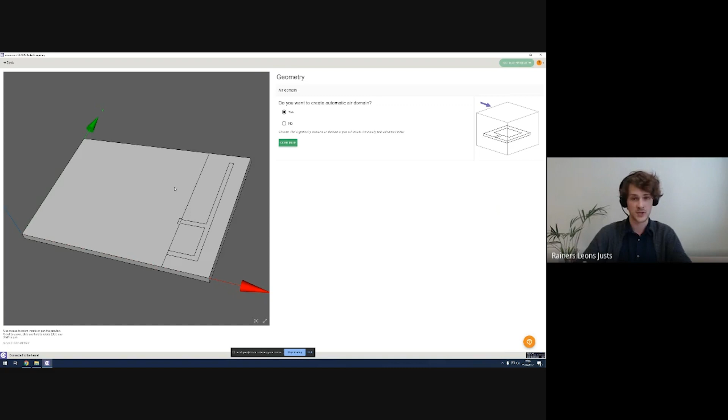So next up, we're greeted by the geometry application type screen. As you can see, CENOS now has more predefined application types, but these are not the limit of RF 2.0 - you're able to simulate anything you want with custom.

Primarily we have defined 5 predefined application types. The first one being microstrip/PCB. The second one is wire antennas. The third one are reflector and dish antennas. The next one is multi-port networks. And last but not least, waveguides.

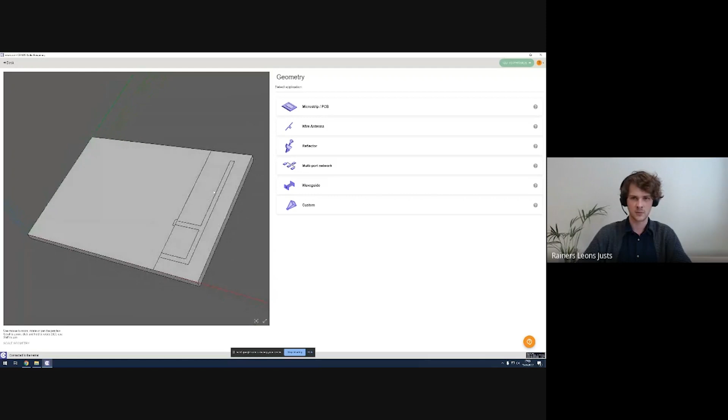So the model that I've chosen is an IFA antenna, which falls into the microstrip/PCB category. Let me just click that, and now we're greeted by the role assignment stage.

The first thing that CENOS asks us to assign is the substrate. Let me click on that role, and now it's going to ask me to assign a volume for the substrate. In this model, we only have the one volume, which is the basic PCB. To assign it, we just have to click in the preview. It gets clicked on the volumes tab on the right side as well, and then just click assign substrate. It's really that easy. Next up is the patch.

In this model, we defined the patch to be a 2D face on the substrate. To select that face, we have to head into the Faces tab and select the patch. Select that in the preview, it turns blue, then press Assign Patch.

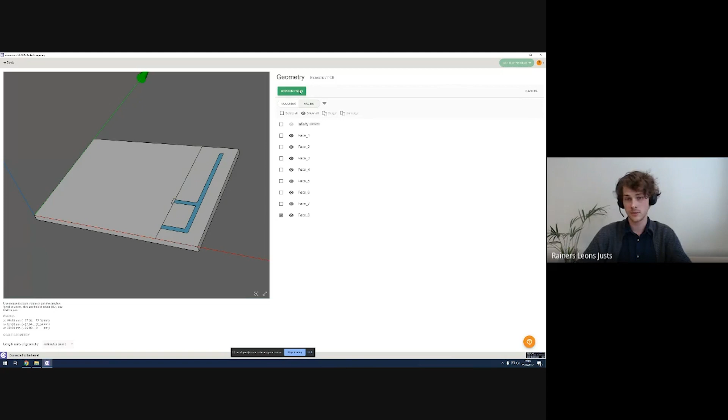Same goes for the ground. We click on ground, assign the 2D face that I've defined previously as the ground, click, and assign ground. It's really that simple. Next up is the port definition.

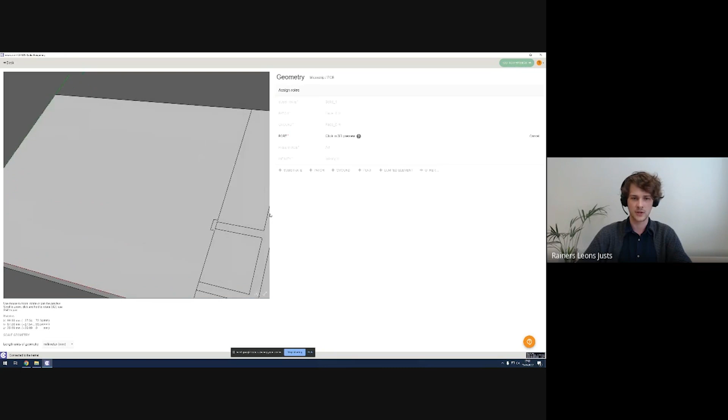So we've introduced the point-based port definitions, which make the port definitions infinitely easy. All we have to do is select the role. It asks us to click in the preview to select 2 points. Let me pan over to the place I want to select the ports, and then I just assign point 1 and point 2. So I selected the 2 points between which the voltage will be applied.

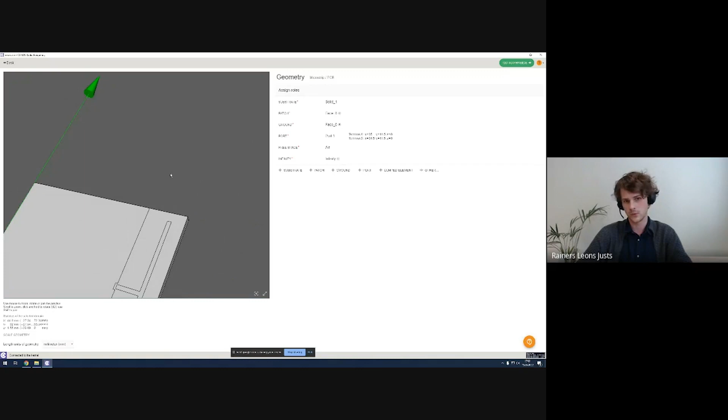And now basically the model is ready. But if I did have a much more complex model, such as I'd have another substrate with its own patch and ground here as well, I could just add additional roles with the add substrate, add patch, and so on. If I had a multi-port network, I could just add a second port as well and define it like such.

We also introduced lumped elements. Basically the same way that we defined the port, we could just select two different points on the model and assign resistance, inductance, or capacitance to those 2 points, just by clicking Add Lumped Element.

And so, since this model is quite basic, I've already defined everything, and now we can just head on over to the physical settings stage. To do so, we just click Go to Physics.

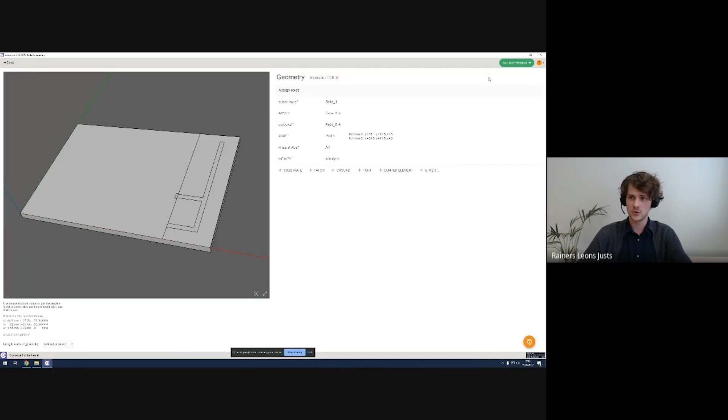And now, in the physical settings, the first thing we are greeted by is the Simulation Control tab. Here, we select the frequency in which we want to simulate. So we are able to simulate in a single frequency, or we can define a frequency sweep as well. In this case, I'm going to select 2100 megahertz as the starting frequency and 2400 megahertz as the end frequency, and for the frequency step, I'm going to select 100 megahertz.

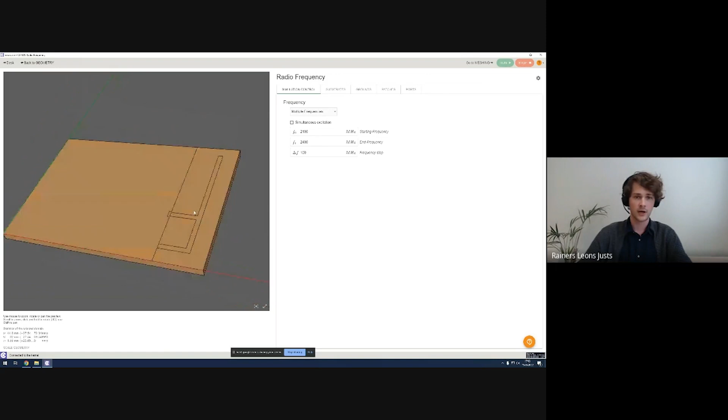Here you can also see a switch that says Simultaneous Excitation. So if I had created a model that included more than one port, I could decide to enable simultaneous or sequential excitation of the ports. But in this case, I only have the one, so I'll leave that as is.

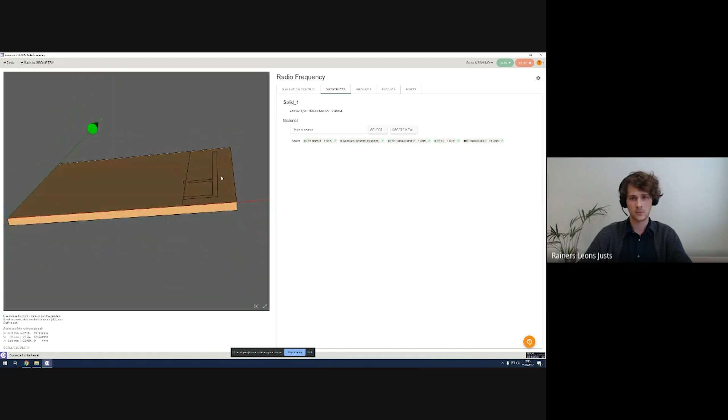Over on the next tab, we see the substrate, and we have to assign the material for that volume. CENOS already has quite a few materials defined from which you can choose. You can also create new materials by clicking New, creating a name for it, and assigning parameters such as the dielectric constant and the dielectric loss tangent. In this case, I'm going to select the predefined FR4 as it suits my needs just fine - I select the FR4 and then press Apply.

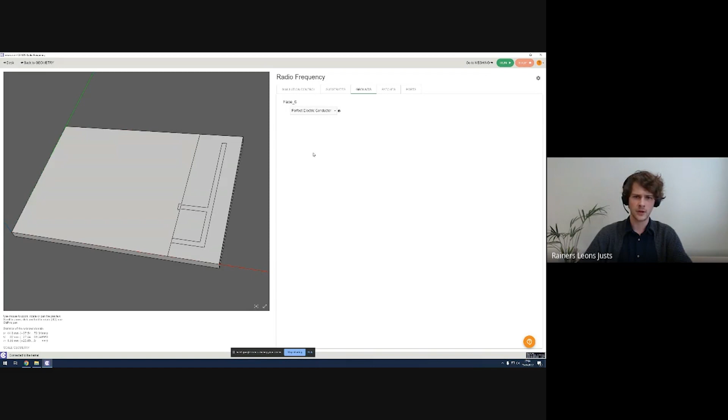So now I have pretty much defined everything in the model. We also see two other tabs here called Ground and Patch. These are already predefined as perfect electric conductor, and we really don't need to do anything here unless we want to simulate using real materials.

To do so, we just open the drop-down tab and select conductor. Here we can also assign the ground to be, let's say, copper, and then we would simulate using real materials. In this case, I'll keep both the ground and the patch as a perfect electric conductor.

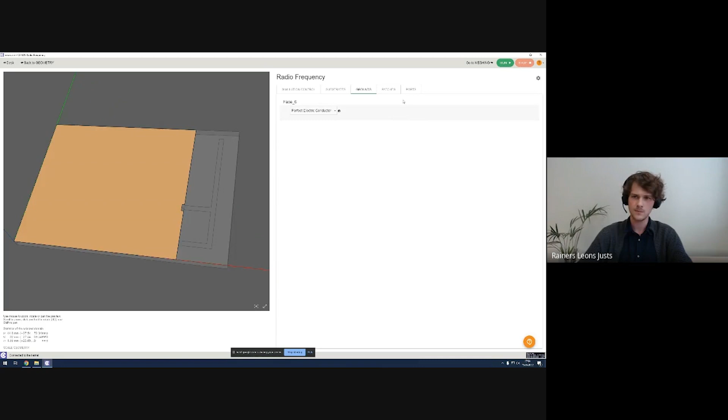In the last tab, we see the port. Here we already have automatically assigned the impedance for the port and the phase shift angle to be 0. But if you want to apply a phase shift, or if you have multiple ports and want to simulate phased arrays, you'll be able to assign a phase shift angle for each port.

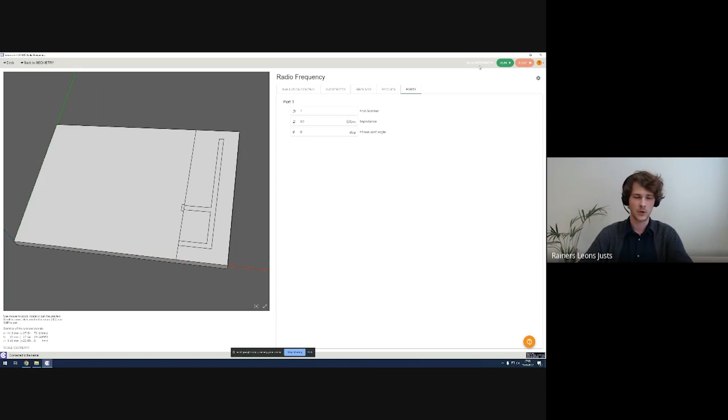And basically, the model is already done. So if I want to simulate right now, I can just click Run and it's going to simulate the case. However, I did mention there is a fourth and optional step, which is meshing. In this step, you're able to manipulate the automatic mesh to your needs, so basically manual meshing. Let me showcase that quickly.

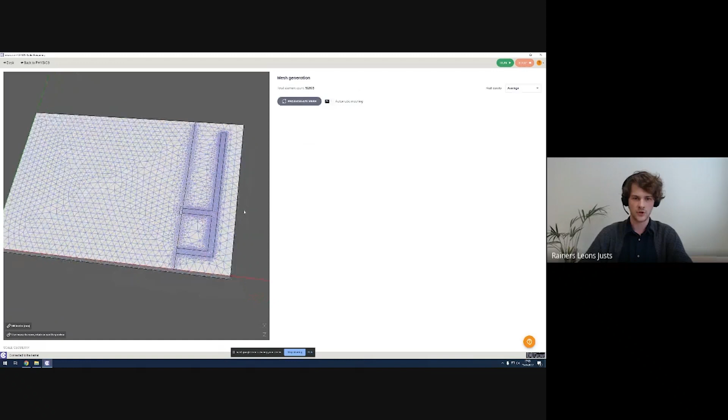So for starters, we're greeted with the bare model. Before we can actually do any manual meshing, all we have to do is just press Calculate Mesh, and it's going to create the automatic mesh for the model itself. As you can see, the mesh already took into account the rules we assigned, so it meshed the patch finer and the edges to the ground as well.

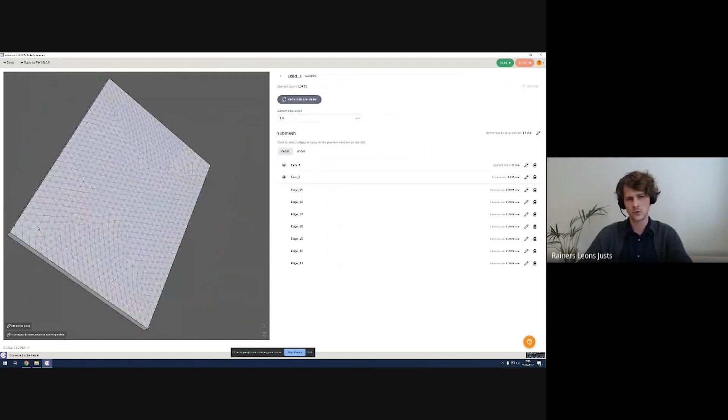But if I want to add another refinement, I can just disable the automatic meshing, and now we can head into the submesh for the substrate. Here we can select whether or not we want to select individual faces to mesh finer, or select another edge selection and assign more edges that I want to refine more finely. We can also already see the characteristics that the automatic mesher has already applied.

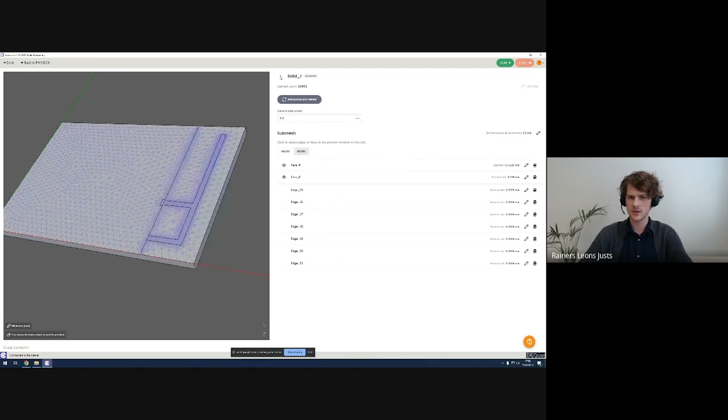So in this case, I think the model looks quite good, so I'm not going to do any manual meshing. Right now, I'm just going to press Run the case.

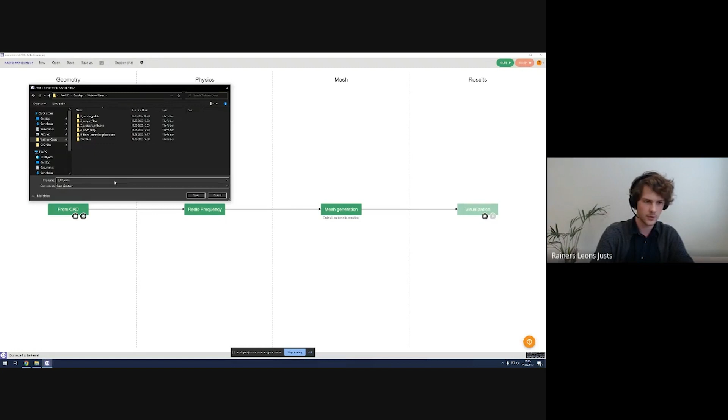Before we can actually run the case, we have to save the case in order to save the results. So let me do so. Let me save this as 0_IFA webinar. Press Enter, and then it's going to run the case.

So now we have about 1 or 2 minutes while the simulation finishes. So let me showcase another important feature of CENOS, which is the live support chat.

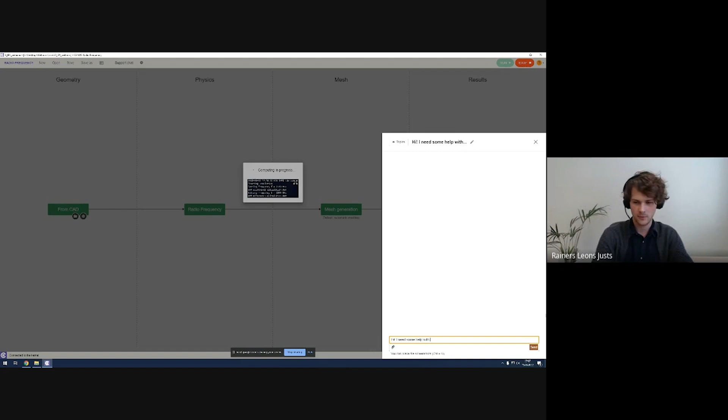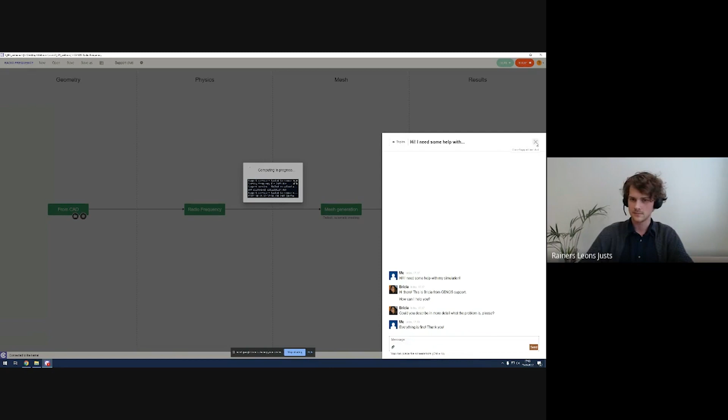So the results are about to be done. Looks like we also see that Bricia has mentioned something else, so everything's fine there. And so we have to wait a few more seconds until the results are prepared.

So now it's starting our visualization tool, which is ParaView. It might take a little bit more time since I'm streaming this. So here we see the results. The initial screen of ParaView shows us the radiation pattern of the antenna and the electric field distribution.

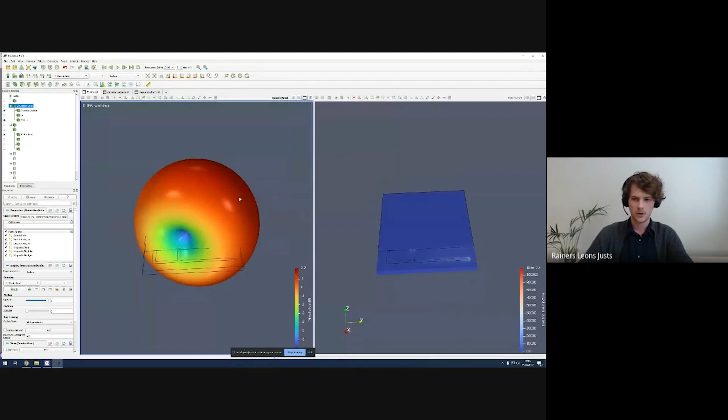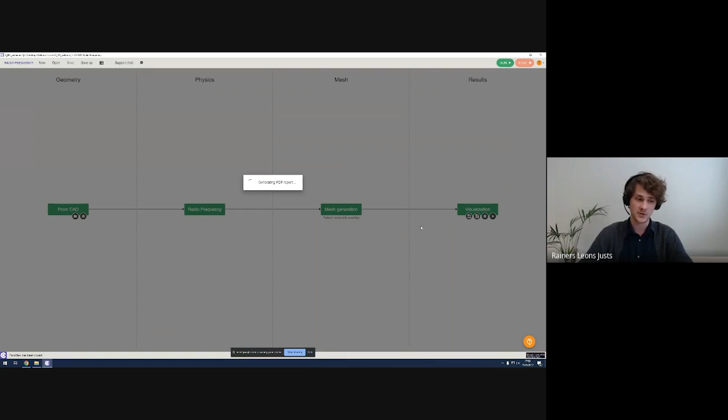So let me showcase another great feature of CENOS. Let me close ParaView here, and let's generate a PDF report. This is a handy feature that you can use to share the results of your simulation with a customer or a colleague, or maybe even a superior. You can probably also store these in your own databases to showcase and keep as results later on.

So this is the antenna we just simulated. It shows all of the results that we saw before in ParaView, and here's the 3D far field as well.

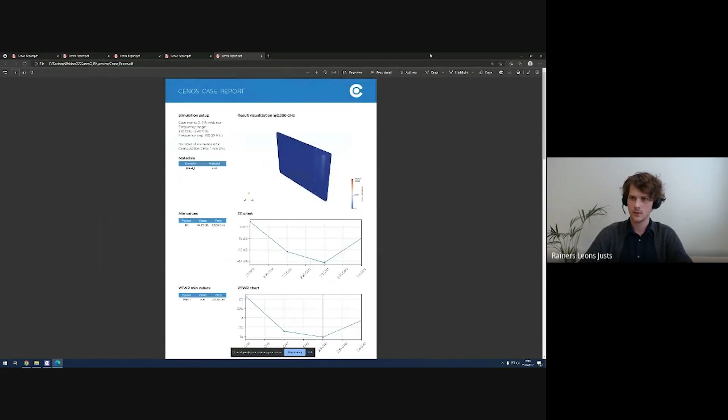So basically this is a quite simple case to simulate. We have also prepared a few other cases that are more complex than this one. Let me open up one now.

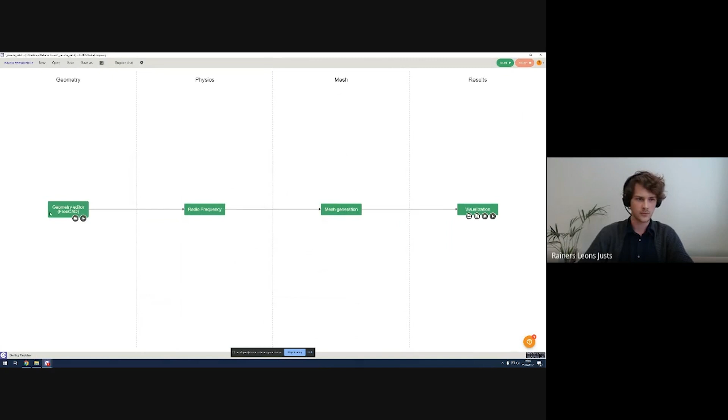First off, we have a circular patch antenna. As you can see, it has an SMA connector at the end as well. Since you already simulated this, I can just open up the results. So the same deal that we saw before: the radiation pattern, the electric field, and the frequency charts.

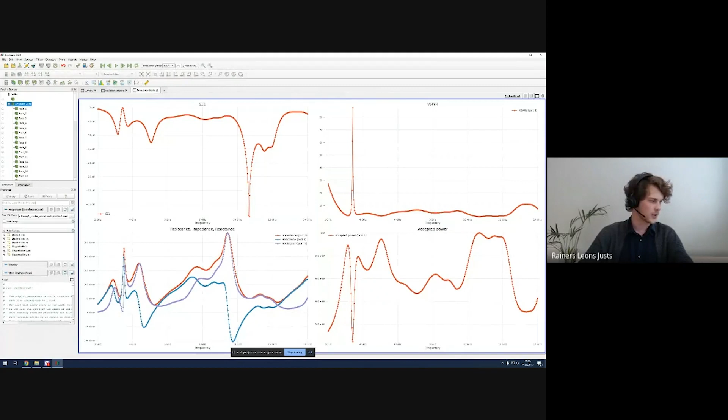Next up, let me close this. We have a hairpin filter, so a multi-port network. We can take a look at them all here. Let me open up the results for it as well.

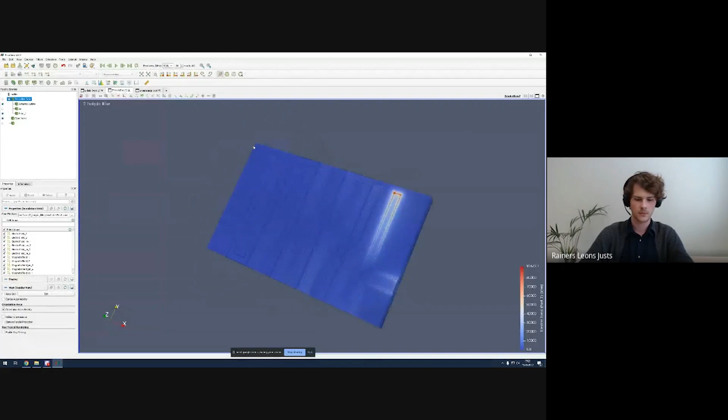In this case, since we used multiple ports, we just see the electric field for each individual port. The first slide is port 1, and the second slide is port 2. Here's the S parameter plot, and let me select the frequency, let's say about 3 gigahertz.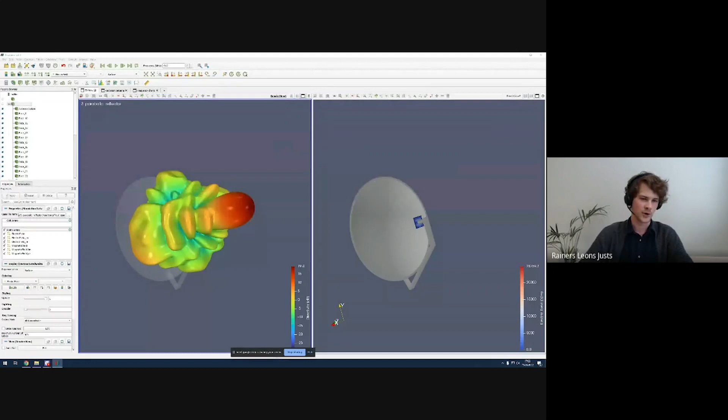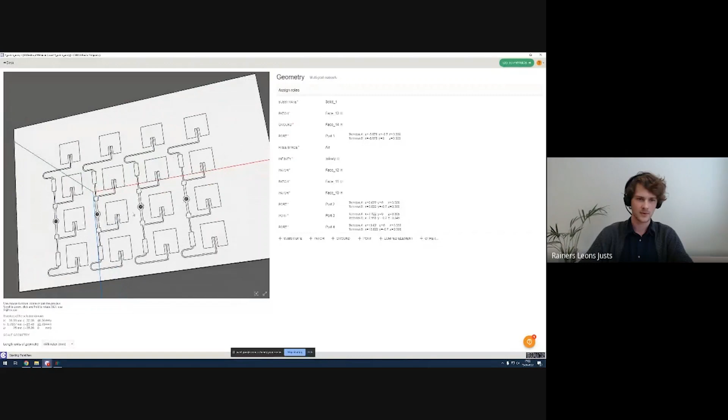Another case we can showcase right now is a lot more complex than anything we've shown before. This is a 4-port phase-shifted patch array. Quite a beautiful design, if I say so myself. Let me open up the results for that as well.

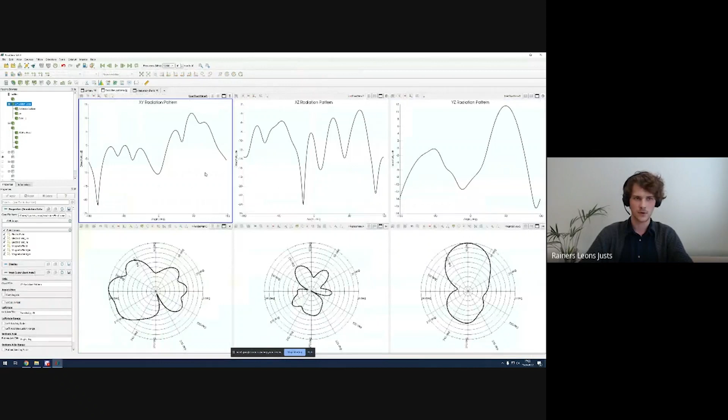Each port has a different phase shift angle applied to it, and that is why we can see some beam steering as well. Here are the polar and the Cartesian slices of the radiation pattern, and here are the frequency charts as well.

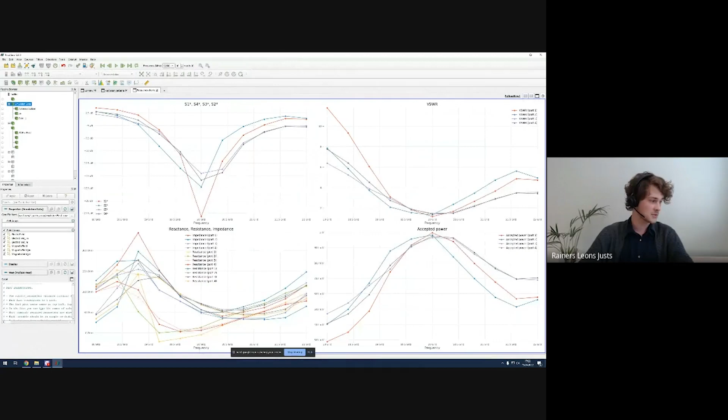And last but not least, a placement study. Here's a drone controller that has a patch antenna placed on top of it. The base of the controller itself has been selected to be aluminum.

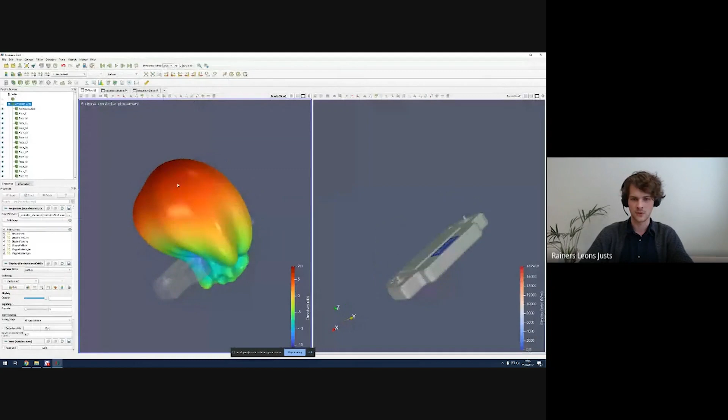And here are the results for the antenna. As you can see, the radiation pattern is really affected by the material of the object that it's placed on. So let's select a different frequency — you can see that the radiation pattern will change in a second.

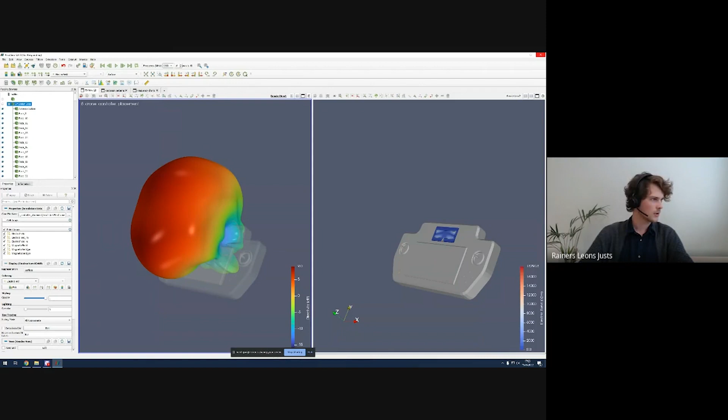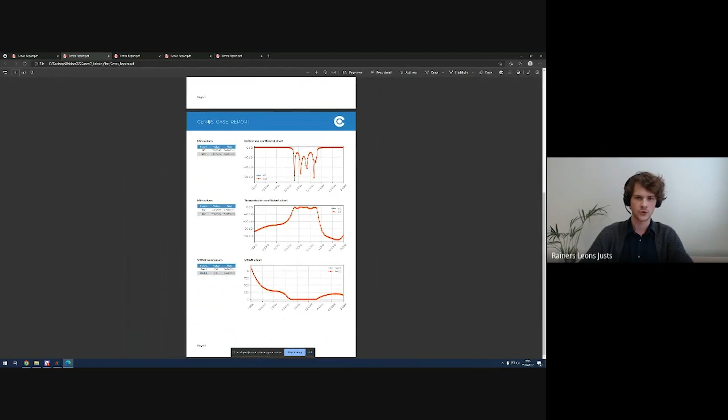And here we can also see all the PDF reports for all the cases that I just showed you. Here's the hairpin filter with its coefficient charts. This is the patch array. And here's the IFA that I showed you before. So you can also take a look at the frequency charts.

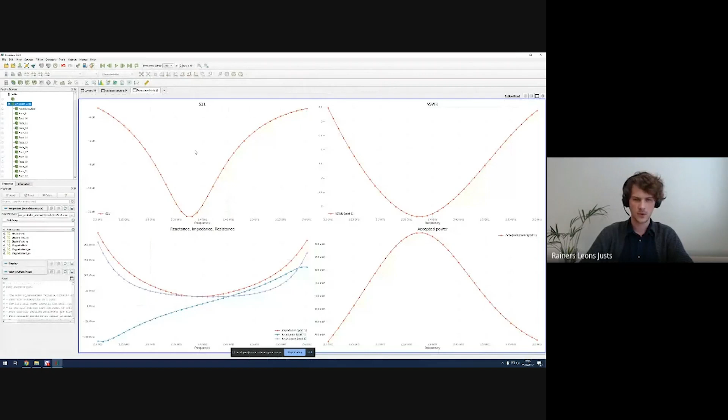One thing I did not mention is that we also provide the option to export your results as a CSV file, so you're able to manipulate the data in your app of choice. You can plot your data however you want and compare it with your other results as well.

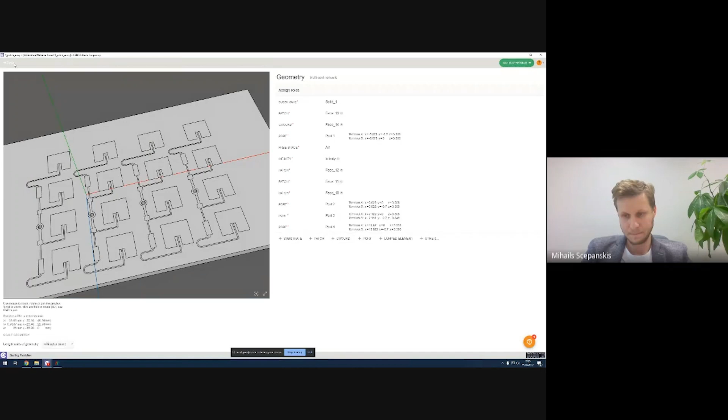I'm sorry, I do not have a camera. Can I ask a question? Yeah, sure, no problem. How to simulate the parameters changing in frequency of the substrate and materials?

Let me pick this question. Did I get correctly that you ask for frequency dependent materials? Yes. Okay, currently the software does not support frequency dependent materials. Basically, you just need to create multiple material instances in the library which reflect a different frequency, and then apply that for separate frequencies for separate simulations. So it will just be a separate simulation for now. We do not have this function in the library.

However, we are already aware of this, and it's on our roadmap. There is some scripting language which can be used to start the simulation, load the simulation, and change the parameters of the materials. You can prepare multiple simulation cases and run them in a batch with a script, let's say overnight, for example. You prepare multiple cases in the evening, run that script, and in the morning you will have all of them simulated. This is an option. Okay, thank you.